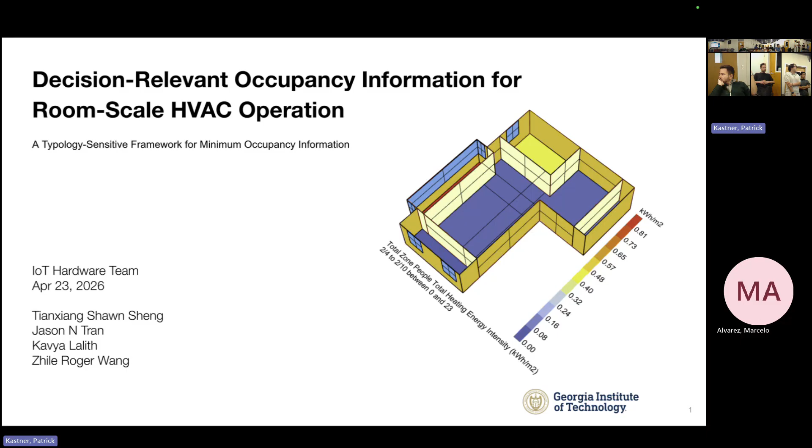Okay, so basically our research will be decision-relevant occupancy information for room-scale or zone-scale HVAC operation. More specifically, a typology-sensitive framework for the minimum occupancy information for the design process or in the operation. So the background is that the building performance gap is multifactorial. It's not just an equipment problem.

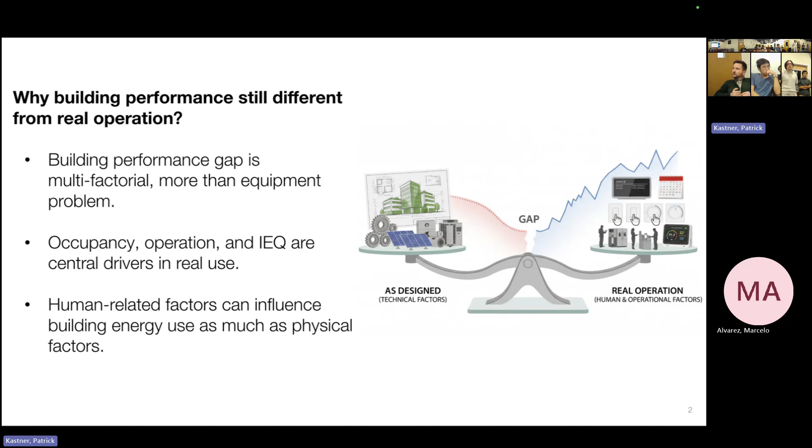So also what happens in the room, like the occupancy operation and the air quality, is random and it's going to be the biggest driver in real use, making the performance gap with the simulations. And especially the human-related factors will influence the building energy use as much as even the physical factors. So it's going to be a big problem in real operation.

So the current HVAC operation still relies on simplified occupancy assumptions, static assumptions for the activities, for the equipment load, and just setting a consistent density or a fixed schedule. But the real use is more dynamic. You don't know when people arrive or depart, and maybe they just take a short break, but the equipment is still on. Also, the spatial distribution is going to be different.

People probably aren't going to stick to exactly the same time every time. Also, from the behavior pattern, we will have different metabolic peaks and stuff from humans. But if we put all the information into the system, it's just going to make the HVAC system more confused because it's just too much. So the issue is not just missing data alone, it's oversimplified representations. So based on that, well.

So I do have to try to. Okay. I don't know. Oops. Try now. Okay. So I need to have my mouse pointer on the slide, otherwise.

Yeah. So basically, from previous research, they already know occupancy uncertainty drives very large simulation error gaps. And occupancy-based control can save energy while maintaining a reasonable comfort rate, like the standard of over 80%. So the main question is, in real use at the practice level, how do we influence decision making? So what minimal set of occupancy information is sufficient to meaningfully improve room-scale HVAC decisions under different spatial and operational contexts?

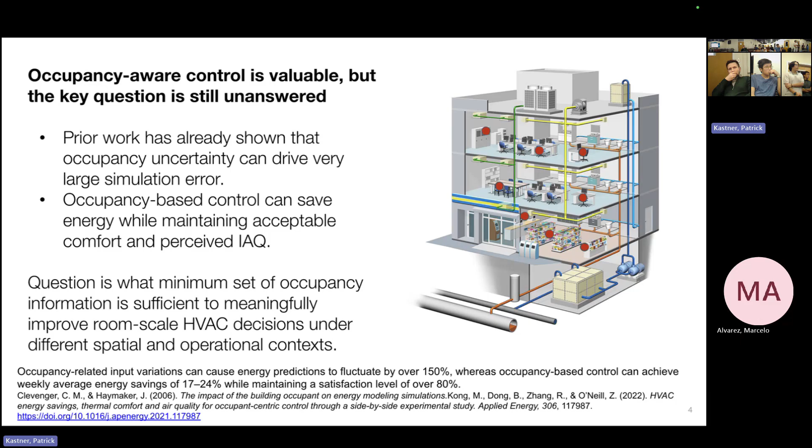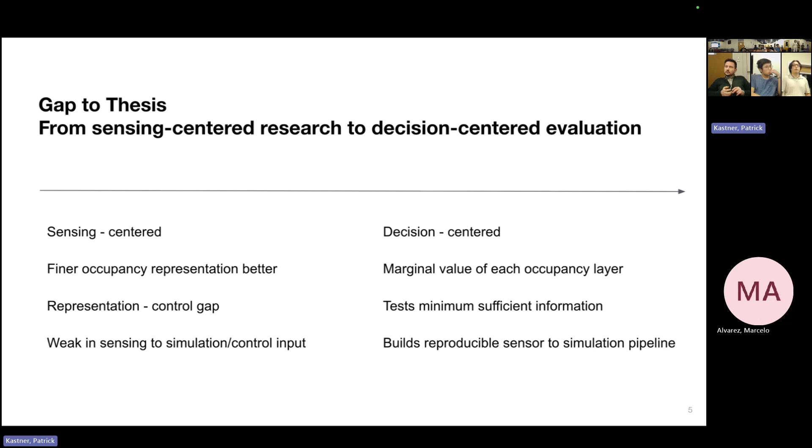So basically, from the gap to the thesis, previous work is still mainly sensing-centered, but we are moving to decision-centered to try to create some novelty that way. So we are going to find out the marginal value between each occupancy layer, decreasing or increasing by components. And we're going to test the minimal sufficient information for different scenarios. Also, it will be a reproducible pipeline, a framework for testing rooms.

So this is an outline for the whole thing. Starting from the hardware sensing, we collect the data and go into pre-processing to abstract all the information into a schedule that the simulation can understand, and we will create different generated scenarios as input for the simulation. Then under a controlled comparative simulation, we will have accuracy results, and then we do evaluation on it.

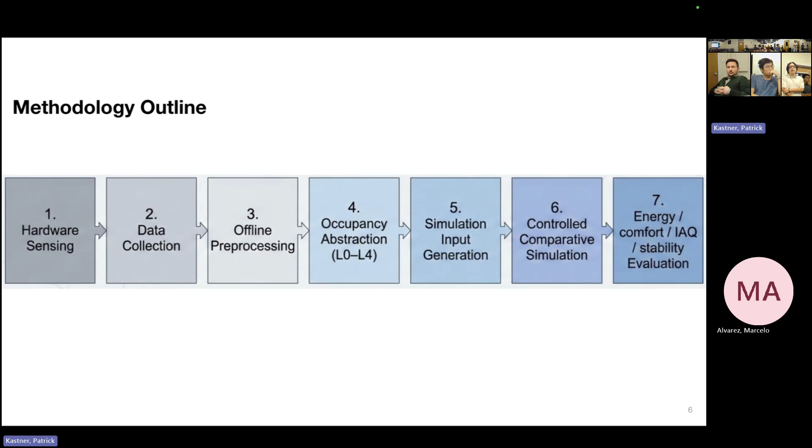So first, for how we will acquire the occupancy data, we're using a thermal camera. It's called the MLX90640. Doesn't really matter too much, but basically it's going to be installed on the ceiling of a room, and it has a pretty wide angle, and it picks up temperatures in a pixel array of sensors.

If we go to the next slide, you can see a little better, but it picks up temperature sensors of each location and outputs it just as an array of integers of what that temperature it's sensing is. And essentially, the way we're going to do it is take the ambient temperature of a room, and humans are around 5 degrees hotter usually.

So you can pinpoint, using a bounding box, the pixel locations of where a human most likely is, and then figure out the midpoint of that and say that there's a human there. So this one, for example, is just picking up one human, and it gives you output of the number of humans and then the XY coordinates of each human.

And the reason we want to use this is because it's not going to pick up any faces or anything, so it's going to be pretty private. And it also takes in a lot less data than you would have if you used a camera. Is this one human standing static? Yeah, but this is from a top view, I think this was when my friend was kind of raising her arms. Okay, I see.

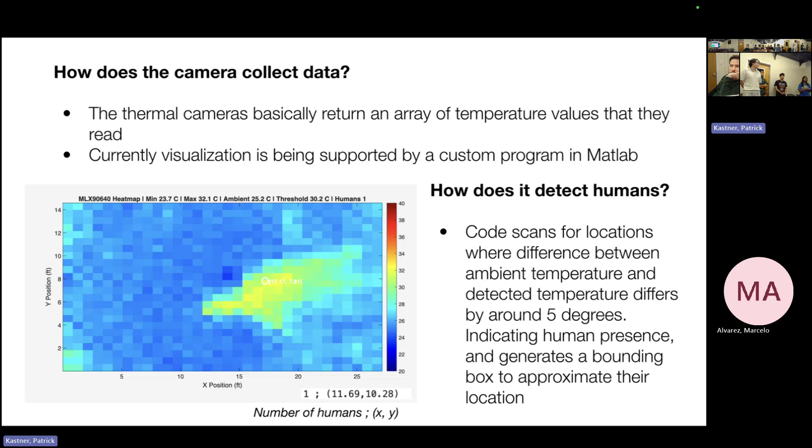And dynamically, how quickly does this update if they walk through the room? It's pretty fast. I forget the exact refresh rate, but it's in milliseconds. Okay. But sometimes the temperature of a spot, if a human walks through it, can take a little longer. So more than the camera, I noticed it was updating a little slower, but it still should be quick enough for our purposes.

And then the final version, so this is the prototype I've been working with. Ideally, when we actually go into it, I'll solder it up so that it won't have any loose contacts, but we'll just have a couple of ESP32 microcontrollers spread across that get the data from the cameras, which is the little sensor on the left. And it'll store all the data on an SD card that we can just take out and plug back into our computer and get all the data. And it'll just be connected to a wall.

This ESP, is this a Wi-Fi thing, or is this different? Oh, no. You could have this connected to Bluetooth or Wi-Fi. So for now, it's offline. In order to look at it, we would have to read the SD card. Yeah. Unless we get a different ESP that has Wi-Fi.

No, this ESP32, you can also put Wi-Fi on it. But for our purposes, since we'll probably have a session where the data collection is happening, I think it may make more sense, with the amount of ESP32s we have, to start off with an SD card. But we could also probably transition to Bluetooth or Wi-Fi too. But yeah, these do support that.

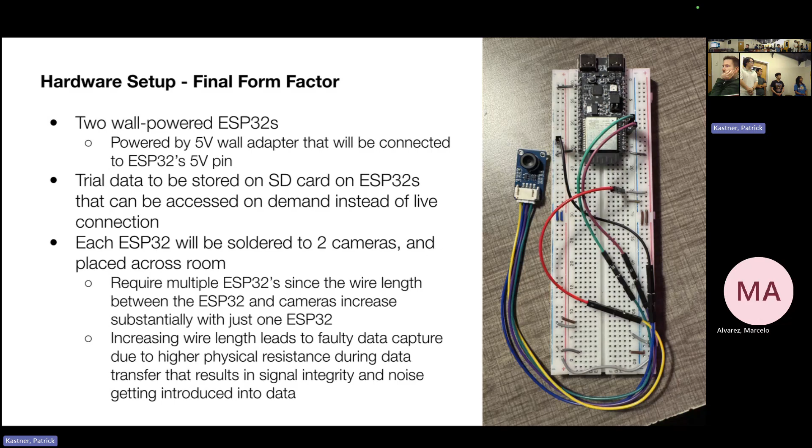So based on the hardware part, we can achieve a different hierarchy of occupancy information. Level 0 is going to be a baseline, which will be fixed schedules. Level 1 will be binary occupied or unoccupied. Level 2 will be the whole room head count. Level 3 will have the spatial distribution since it's a camera.

So we could zone sitting areas, working stations, or subzones, stuff like that. And level 4 is going to be the activity, basically the behavior patterns. So we will map from the spatial distribution to people's behavior, and then we will have more accurate human metabolic rates on that.

We do that because more information is not equal to more value. The value depends on the control objective, spatial context and the deployment burdens. So it depends on how they're going to design and how they're going to operate the rooms.

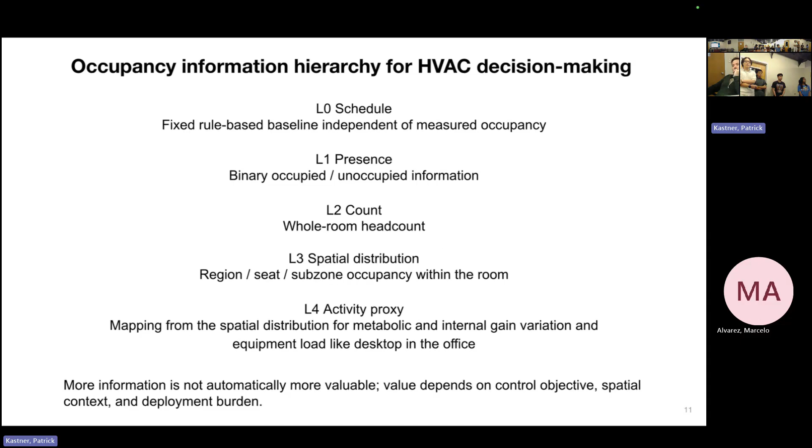So for now, we haven't implemented this in the room yet. We are trying to achieve our pre-testing on the simulation. We're doing fake data for the data expansions because the fake data is hourly, year hourly.

It's a comparison of the default fixed data they have, and we're creating a more realistic way using our semester variation and academic calendars, adding holidays and special days that only happen in school. We're also creating different occupancy patterns on weekdays. For example, during finals, people may not go into the lab. So we're just trying to make the fake data more realistic.

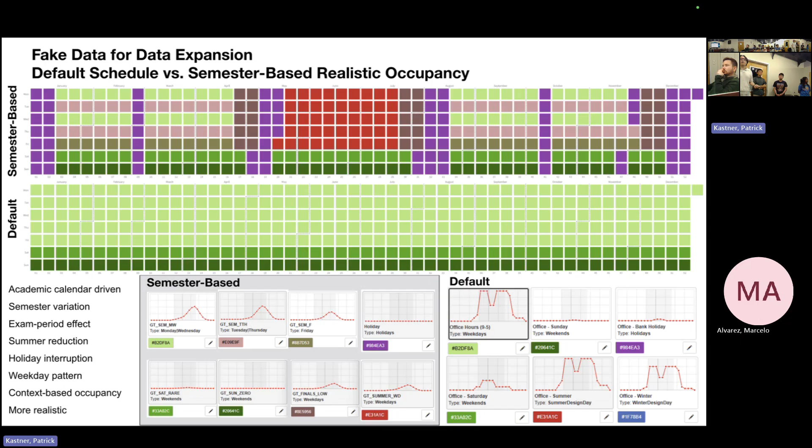Also, changing the daily occupancy rate from the default. The default always goes to 100%, so we're changing it to a more realistic value—usually maybe only 50% at the most for the 10-seat room.

So for the current state and end goal of our software pipeline, currently I'm using Sean's synthetic occupancy data to prototype our pipeline because Kavia's entire setup is not set up in the SimTigrate lab already. However, it is in the software pipeline available as an input to use our sensor data, so there's two modes of input you can use.

Currently we're just using the synthetic occupancy to test the pipeline in general. This synthetic information is behavior informed, so we start with the room scale hourly schedule, and then we distribute occupancy positions across the room, prioritizing desks because that's where students and people tend to work.

For some of the logic constraints, the northern desks, which we'll show in an image on the next slide, have more stable occupancy, while the west and south computers carry the most occupancy. People generally just float around the room if they're not sitting at a computer.

Our end goal is to replace these synthetic inputs with live sensor-detected 2D positions, which we'll be able to get soon, I believe. Then the outputs from this software pipeline will inform the schedules and the Grasshopper HVAC pipeline that Roger's working with.

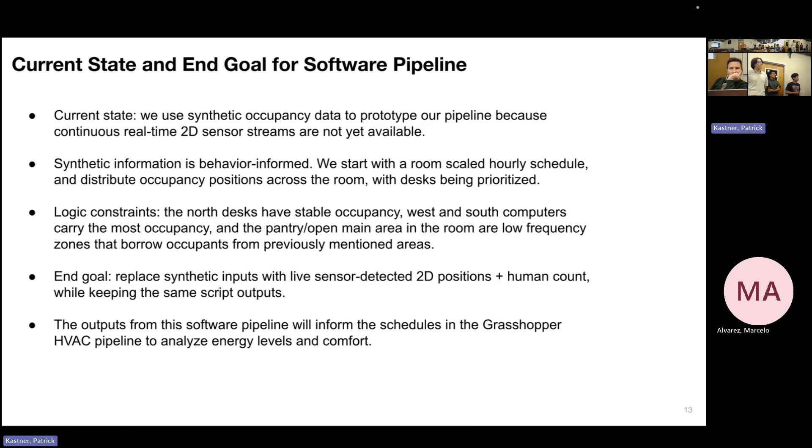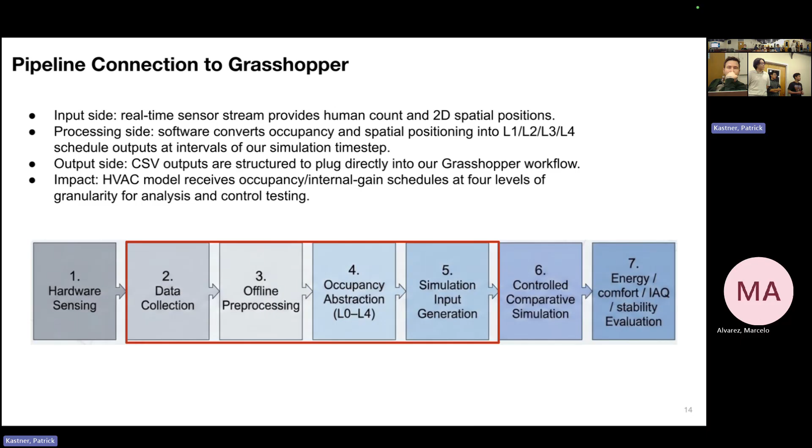So for the pipeline connection, this shows where we're sitting, where the software is at. For the input side, it's Kavia's data, which we process and turn into the L0 through L4 occupancy abstraction layers. The output is a CSV file, which will then be input into Grasshopper.

So I guess this is what the script generates—it generates the 4 levels of granularity that we've been talking about throughout the presentation. This is an example of what the input looks like in the CSV file. For the synthetic data, it's just a fraction, a rate at intervals of 60 minutes.

This fraction is based off a nominal occupancy—like 10 people, you set a number of people, and then it determines how many people are in that room at a given time from the schedule. At the bottom is what we're going to be using for the actual data; the fraction is out of how many people, out of 100% occupancy possible.

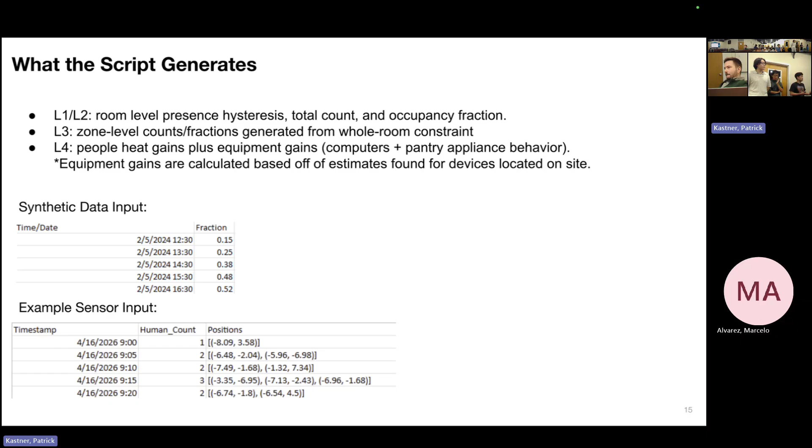Yes, and then the bottom is what the actual physical real data would look like. It has the human count and the positions, kind of like what Kavya showed earlier from our sensors. And then these are the outputs of the script.

We can see from here we have the L1 through L4 granularity—the presence hysteresis, the total count, the occupancy fraction. As you can see in the bottom image, we have the total heat gain from people: their metabolic heat gain, the equipment heat gain, which totals up and allows us to be more informed with higher levels of granularity.

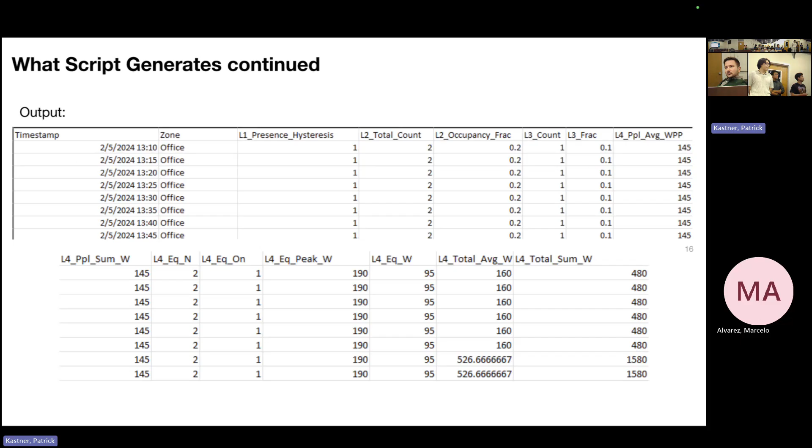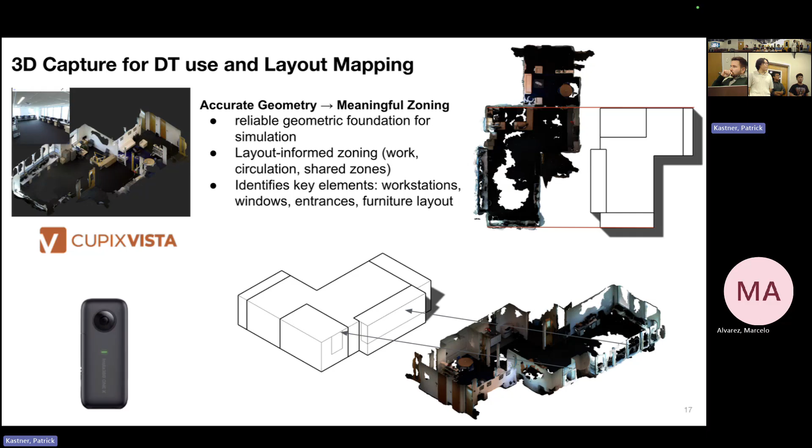And then for how we're going to map the data, we had a 3D capture using a Cupix Vista, and it generates a point cloud, which we use to build our digital twin and model this simulation.

So I have an image in the bottom right where we have a visualization of how people move throughout the room. We can use this to determine what zones they're in, if they're sitting at a desk or at a computer.

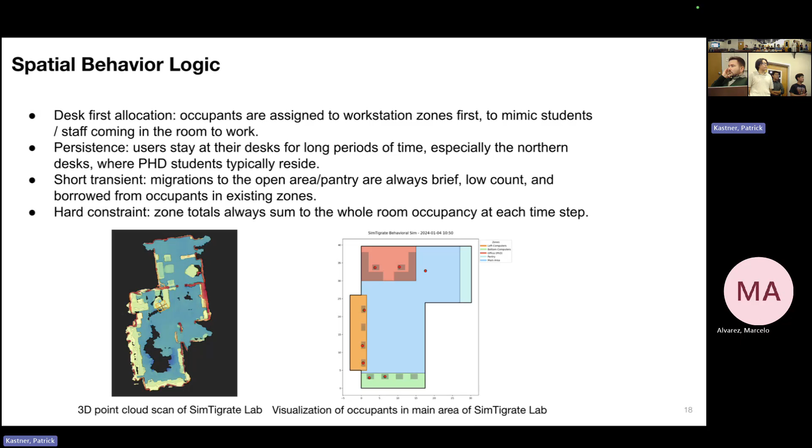For real-time uncertainty and validation, in our current version we stabilize the occupancy before we process and output the results. We convert our schedule into a 5-minute timeline with time steps at 5-minute intervals, then fill in temporal gaps by resampling to interpolate the results.

Then we do rolling smoothing to reduce random noise that could occur due to sensor uncertainty and random sensor errors. And then we apply presence hysteresis, so brief zeros, like a sensor momentarily not detecting someone, don't immediately flip our occupancy state.

For next steps, we plan on having future validation, maybe like a QR code check-in, so we can track the actual count of people in the room.

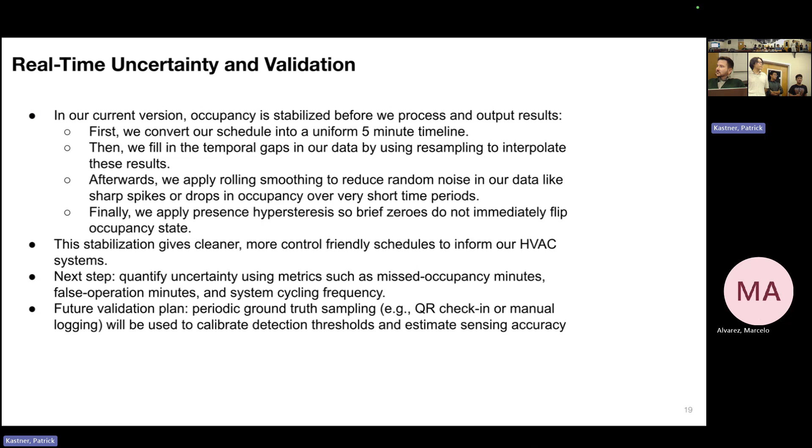So I've done the simulation from L0 to L4 in Grasshopper, mainly using Honeybee. The general workflow is I apply the CSV schedule to the program and the HVAC system. In this case I'm using the Honeybee Ideal Air component, and we apply the program and HVAC system into the model. After simulation we get the results.

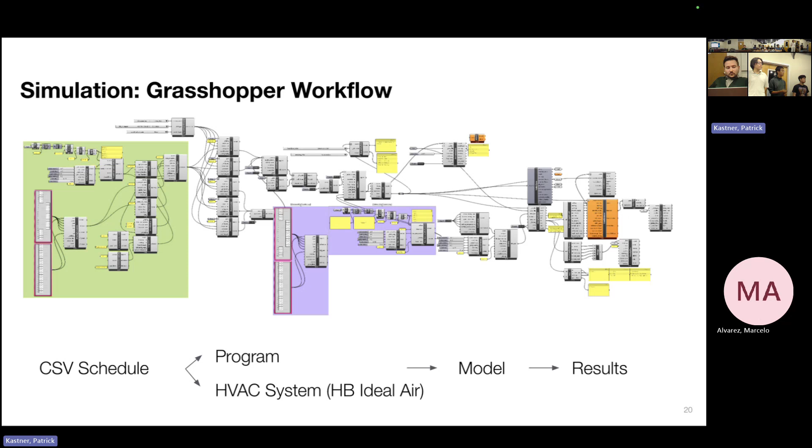So what is a program? A program is where you can set parameters regarding people, equipment, lighting, ventilation, etc., and apply them to the rooms. As you can see, this is a people component, lighting component, and you can set the occupancy schedule and activity schedule. So the data in the CSV just goes in here.

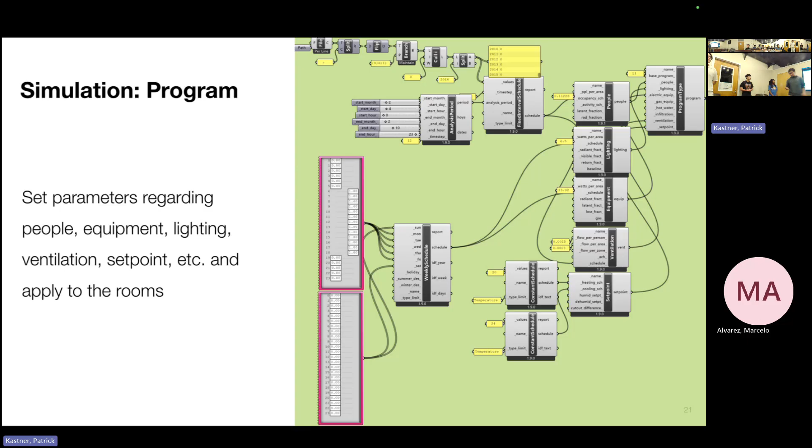Now this is L0, which is the base case. I'm going to go through the program inputs. First, the occupancy is fully occupied at all times from 6 a.m. to 7 p.m., Monday to Friday.

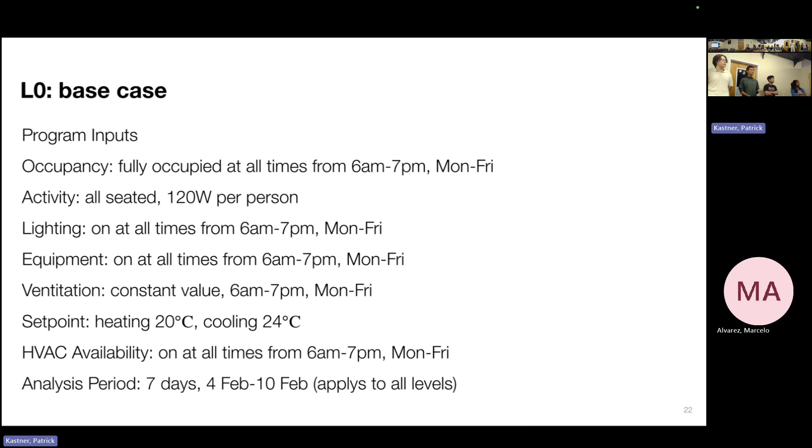By saying this, I'm not saying that's the real occupancy, but that's what's assumed in the design of the HVAC system. So these inputs are essentially assumptions, and as we progress from L0 to L4, because we have higher granularity data, these assumptions will change.

So the yellow thing is the EUI of the rooms, and at the bottom, from left to right, we can see the people gain, the ventilation heat, the ventilation energy, and the electrical equipment energy.

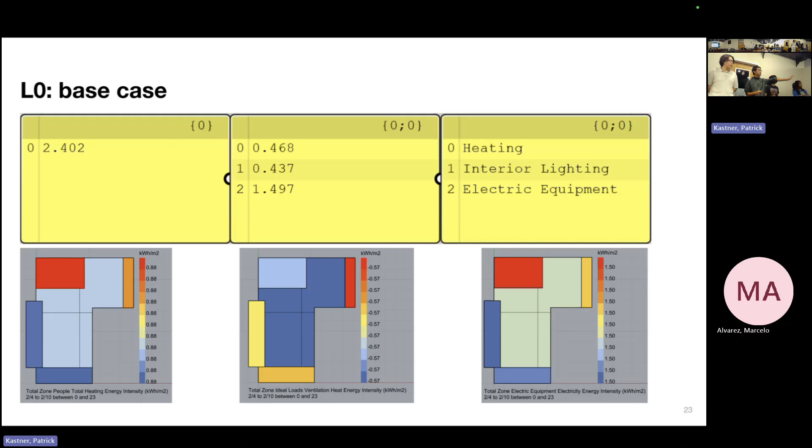From L0 to L2 we haven't divided the zones, so we can see the data is just consistent among all zones. Then we jump into L1.

This is where the inputs for occupancy change. We set it as occupied or unoccupied. If it's occupied, we still assume it's the maximum occupancy. I forgot to talk about the activity.

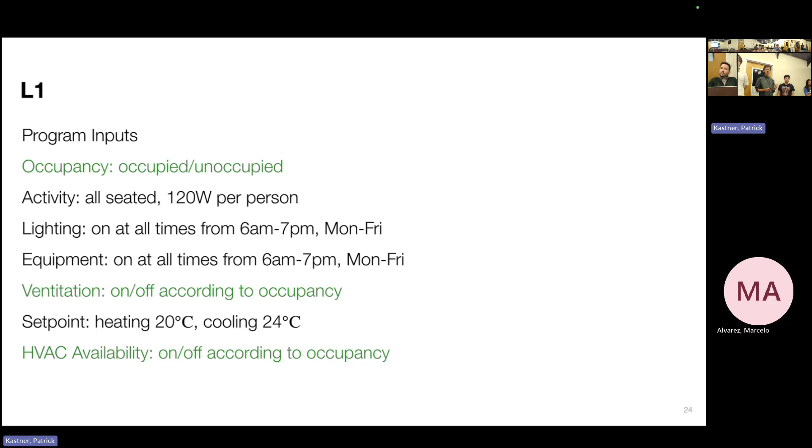Now we assume they're all— sorry, I have to jump ahead because we need to start the next group on time. We need to jump to the end. Oh, yeah, sorry about that.

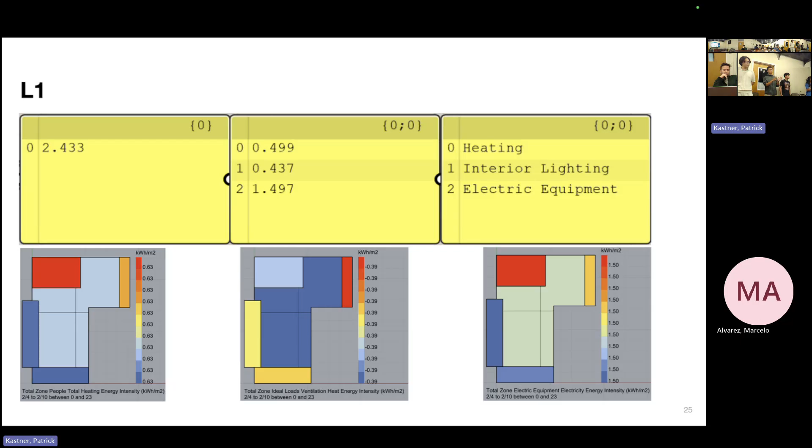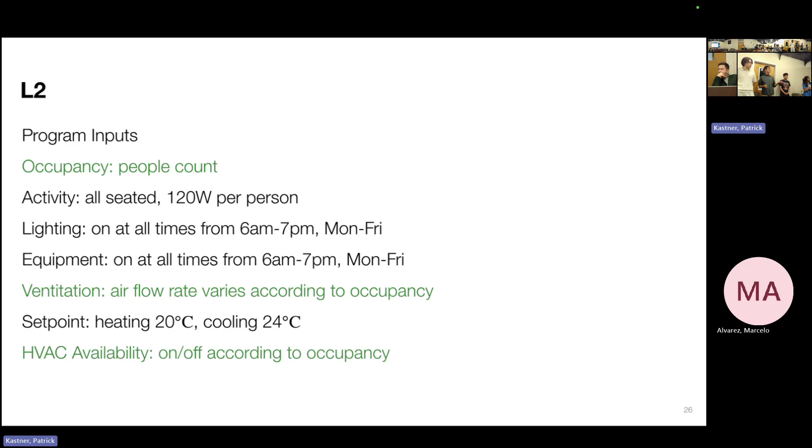For L2, we changed the occupancy to people count, and the ventilation airflow rates vary according to the occupancy as well as the HVAC availability. Jumping to the end.

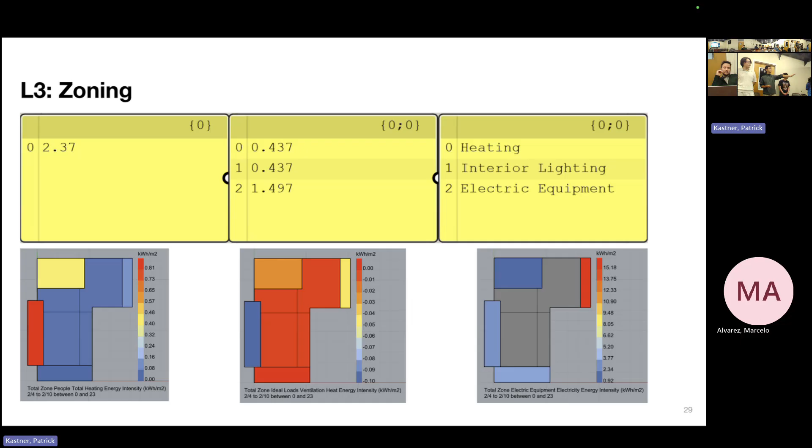So for L3, we have zoning. You can see that now there's a difference between rooms.